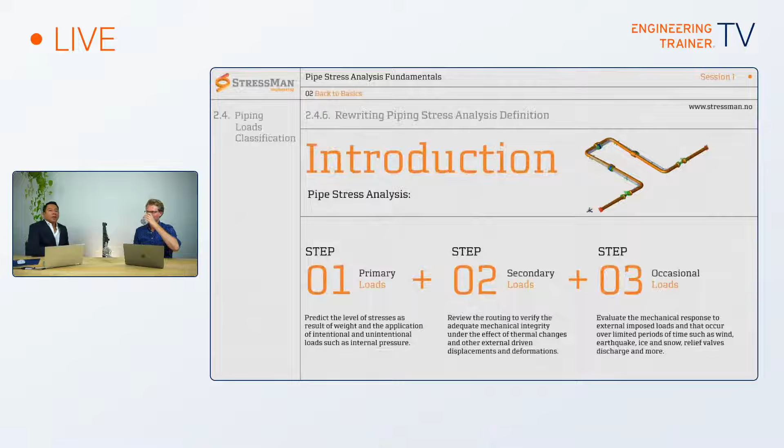As you know, these slides are coming from our training, the piping stress fundamentals course that we have online with Engineering Trainer. This course is about the fundamentals, the foundation to really understand how piping stress works. What is it? Why is it important? And what are the main considerations that you have to take into account to eventually become a good piping stress engineer?

So I would say that when we go to engineering school, you see the stresses as not something that you have to compare against a code. You just do stress analysis of, let's say, a gear, which is a completely different component, not a pipe, and then you use those stresses. But at least in my experience, in engineering school you don't compare it against a code. It's just, is it going to break? Is it not going to break? Is it going to fail? Is it going to be working or not?

But here in piping, we have codes, and the codes are to regulate the way that we perform or execute our calculation. It's kind of like a guide to play on the safe side.

That is also guidance for younger engineers or for experienced engineers, but also to standardize the way that we execute the project. So at the beginning, we have the primary loads, which is what is shown in this slide, which is pretty much coming from the result of weight and the internal pressure. I would put it like that as the basic part: the weight of the pipe, weight of the fluid, the weight of the insulation and the internal pressure, which in this case, if we use our software, it would be W plus P. That's our primary loads.

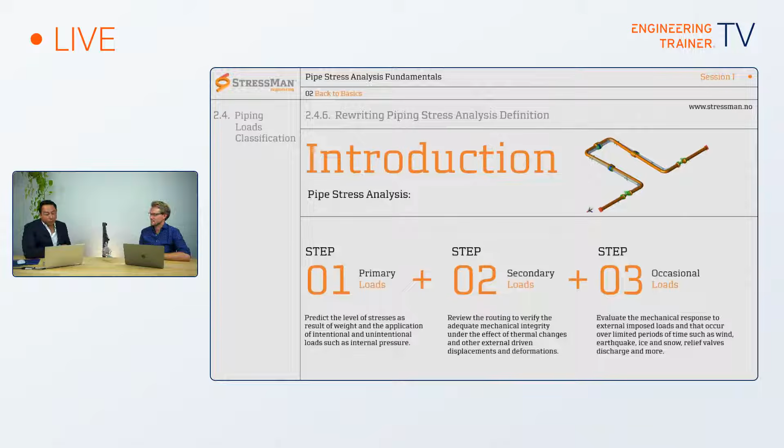Why do we have them in three different groups, primary, secondary, and occasional? Because each one of them is going to be evaluated and compared to the code in a different way. If they were all the same, we could just add the three of them: one is one, the other is two, and the other is three. We have six. The code says that maximum is five. We fail. But no, you cannot combine them like that. That's why we separate them from the beginning. So now we evaluate each one of them, and I think it helps to understand where each one of the issues on your piping system is coming from. Exactly. So now feel free to continue.

Okay. So for example, here we have the primary loads. I really like this picture. I really, really love it. It's so shiny. The render is just pretty.

It is. And as you can see here, these are imposed by loads. What could be the load? The weight of the valve, for example, if you have valves, if you have flanges. They are not self-limiting, and they continue until equilibrium between external and internal loads of the piping system is reached, or until, which is the bad part here, catastrophic rupture of the pipe occurs, when the system collapses. If it's not properly supported, it's going to collapse. If the wall thickness is not well calculated, it's going to collapse.

Now we're going to start talking about the piping stress analysis perspective. When we receive a system that needs to be analyzed in a big project, at the beginning someone else, a piping engineer or a piping materials engineer, is going to do the wall thickness calculation. He's going to give me a pipe specification that I'm going to use, and I'm going to input that information into my CAESAR calculation or piping stress software. I'm going to say this is the diameter, this is the wall thickness.

You would say that you don't have to worry about the wall thickness calculation because that was already done. Of course, it could be wrong, but in general, let's assume that it was correct, as part of the pipe spec. So for us, the main thing would be to think about the weight. What do we have? How are we going to support our system so it doesn't fall, it doesn't collapse?

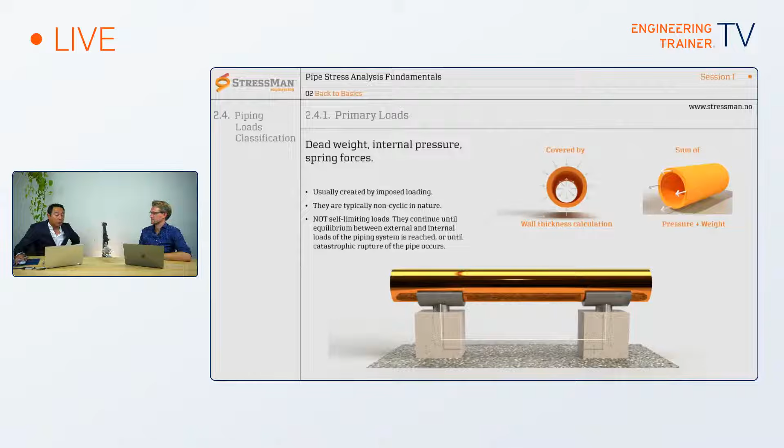I think this is quite a nice graphic to show how the primary loads work. Here we have, as we said, force driven. Once plastic deformation begins, it grows rapidly, and the failure can occur with a single application of a load. Let's have a look at this. I really like this. You have a weight, for example, let's say it's 100 kilograms. This cantilever beam is going to deflect, let's say, 10 millimeters. As you can see in the graphic, I'm going to try to highlight it here as well.

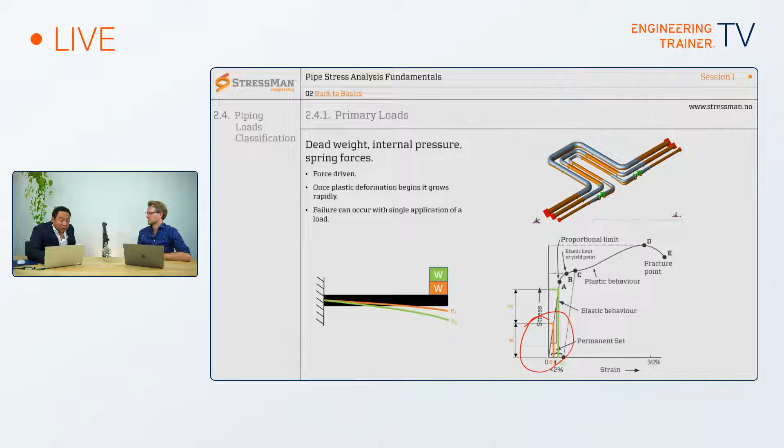As it's shown there, it's going to strain so much that if you double the weight, you double the force, it's going to strain twice as much. As you can see, stress is also twice because we're working within the elastic zone, which means that it's going to be linear, according to Hooke's law.

And then for the third one, let's say that we add another weight. Now this third weight, now 100, 200, 300, is going to go beyond the elastic behavior, and now it's going to start behaving completely differently. So right here is when it collapses. It's just so simple to see, so simple to understand.

If you have a look at this other part right here, at this image, it's not showing it. Just a second. No worries.

Right here, as you can see, there's the little deflection that you have on those elbows due to the weight, because the supports are right here, the other supports are here, and the others are here. So this section is just deflecting a little bit because of its own weight. It's sagging. So if that weight was really, really big, it would just collapse. It would just fall. That's the way that it works.

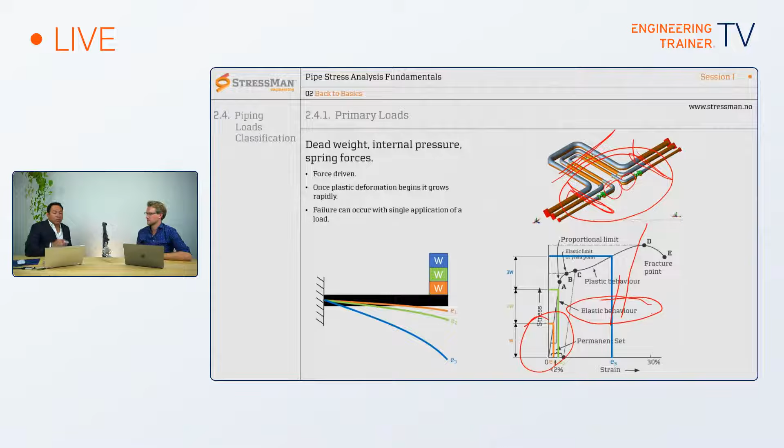Just to simplify everything for everybody, somebody said, "Oh, let's do some pipe span tables," and here different values are taken into consideration, like pipe size, thickness, material. There are multiple variables. The density is so important as well. Whether it's full of fluid, let's say water, or you're going to support a line that is just vapor or gas, the density is going to change.

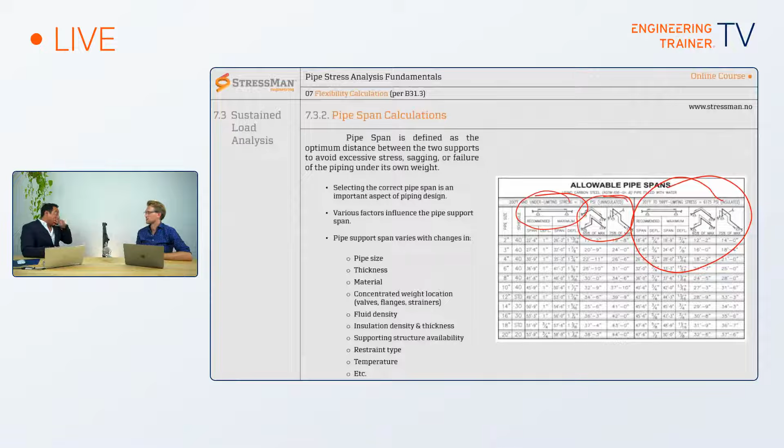And at the end, you're going to have your span for a straight run of pipe, for some quite popular configurations like a horizontal run, or in an XYZ direction. Different routings, basically. These are kind of standard routings. If you see here also, this one is for 200 Fahrenheit and below, and this one is from 200 to 600 Fahrenheit. The pipe span is going to vary depending on the temperature.

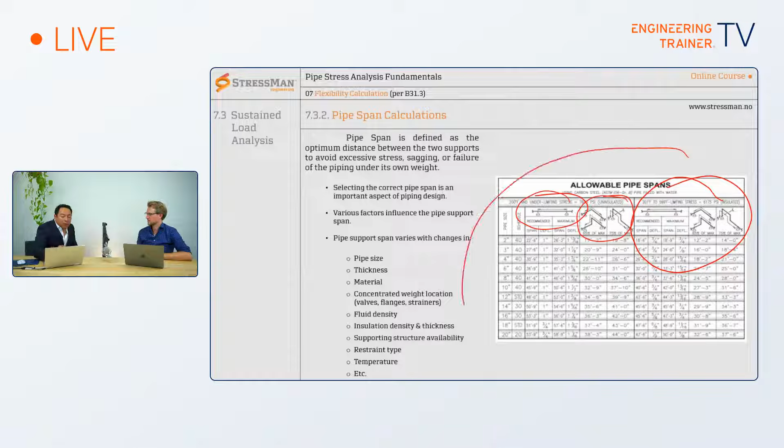So there are multiple variables, but you can always use this type of table just to make it easier for everybody. So what kind of limit is used in these tables? I would say in general it's like 5/8 of an inch of sagging. I think that would be the standard. Maybe some other companies could be more stringent, or a little bit more flexible. It really depends.

And at the end, it doesn't mean that if you are exceeding 5/8 of an inch, it's going to fail. No, it's still okay. That's why we have to use engineering judgment. At the end, these are just recommendations. Just because it says that the maximum span for a 2-inch line is, I don't know, 8 feet, what if you have 9 feet? It could be okay, no problem.

So that's why it's important that we know this. And like I said, this presentation is the fundamentals. This is the basics, so at least when we start getting into this topic, we know where everything is coming from.

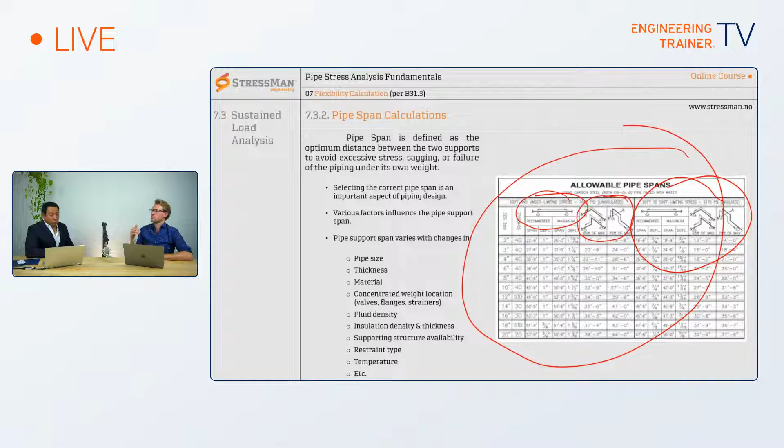So just to summarize, even if you would be using a span length that would be a little bit longer, technically your primary stresses could still be okay, depending on the project, whether you're allowed to or not. But that is how it is organized, if I understand correctly. Based on this introduction about primary stresses, I would like to ask just two basic questions, just to get the basics understood really well.

Let's say you're doing a stress analysis, and in your stress analysis it shows that the primary stress is much too high. Let's say 500%, like a crazy amount. You ignore that, and the system would be built. So what would actually happen?

Well, when it's that much, I think it would just collapse. It wouldn't even be able to stand in place. I cannot even imagine what could happen, but it just cannot be together for too long. Right, basically it just collapses due to plastic deformation, right? That's it. That's what would happen in the steel.

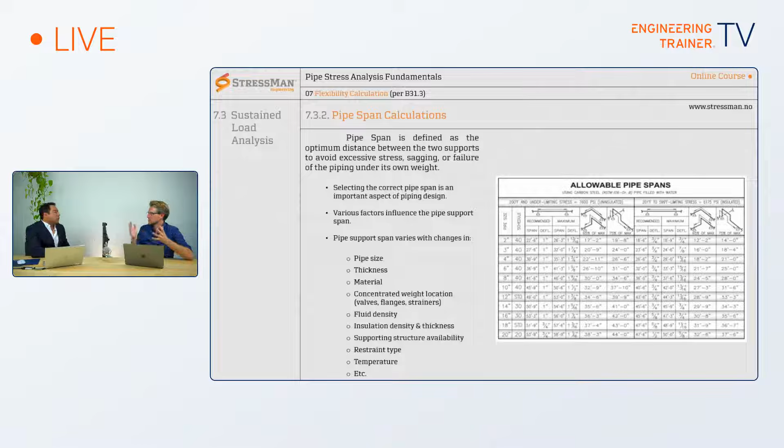All right. So having said that, what is the general methodology to solve high primary stresses? What is the general approach people take? Just to add more support. At the end, I think that's the basic, the easiest solution. And obviously, the other one will be to increase the wall thickness on the pipe.

It can also help because maybe the issue is not coming only from the weight. Maybe there is something wrong with the pressure in the calculation, and if you increase the wall thickness in your pipe, or you go to the next rating in your specification, then problem solved as well. Because at the end, it's not just weight, it's also pressure. So adding supports if you're evaluating weight, and making sure your thickness is sufficient for high pressure, which is also a primary load.

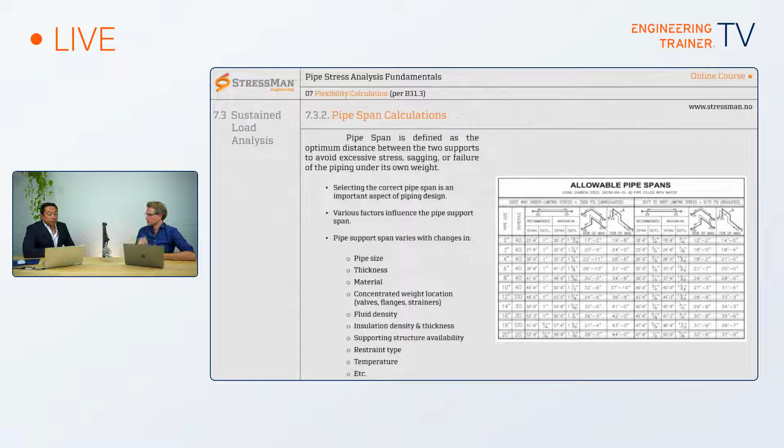All right. So maybe we can now jump into secondary stresses. Secondary loads, I would say in general, are related to displacement. Displacement could be due to sagging and hogging, like I mentioned earlier. It could be matchup tolerances, a little bit of fabrication, settlement, that's another option. But for this particular presentation, let's just think about thermal expansion, the change in temperature from the initial position to the final position.

When you have your temperature T, and then you add that delta T, your pipe is going to grow delta L. Something really simple, very basic. With this type of stresses, they are going to be localized. When they fail, it's not the entire system that is going to fail. It's just in a section, like a fracture in a component, a fracture in an elbow. Maybe if there is a flange close by, it's going to be subjected to a large bending moment and start leaking. That kind of stuff.

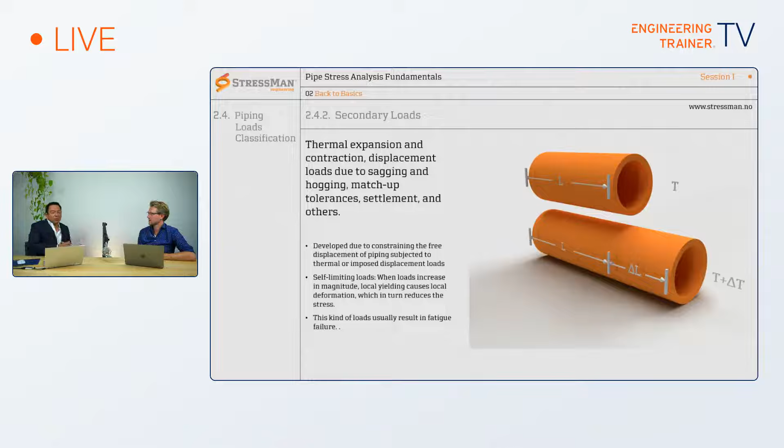It's kind of simple, but that's pretty much the secondary loads. This is a good example as well. Again, this is displacement driven. Once the deformation begins, loads tend to dissipate due to local deformation, which I'm going to show here. And the failure occurs after several load cycles. It may be fine the first time, but over a period of time it's just going to fail.

We have here delta T, let's say, using an easy number, 100 Celsius. That's the deformation you're going to have, the E, the strain, and the forces. Now you add temperature 2, which is twice as hot, another 100 degrees, 200 degrees, and it's still within the elastic behavior. I think now you can see it, elastic behavior. And everything is going well right there. But then we have this one here.

Now it goes 3 times E, and now it's 300 Celsius, let's say. At 300 Celsius we're past the elastic behavior, and it's supposed to go to the plastic behavior. But the stress that we're calculating here is not a real stress, because we're not using the stress-strain curve that we normally use, but the code allows us to do this. And I think it makes it easier. And at the end, it's because these stresses are not going to happen in the entire system, just in a specific location, and that's why it can work that way. All right.

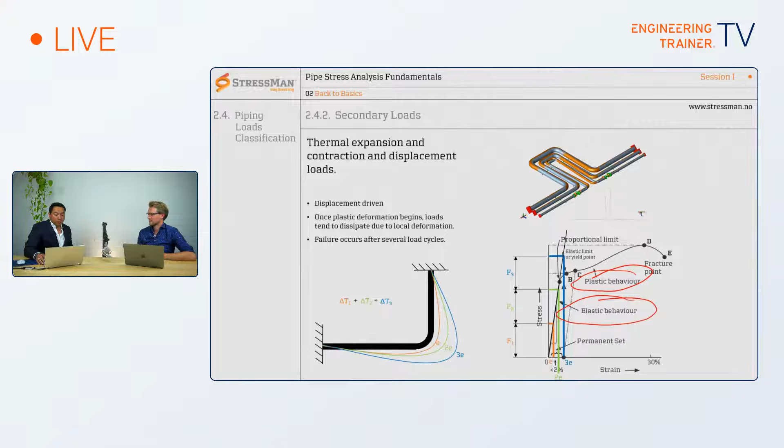Here, for example, we have some examples about thermal expansion and how it behaves in a piping system. Right. It's always important to take into consideration the thermal growth that you're going to have in your system, so you don't have issues like this. So what do we see here? We see a piece of piping.

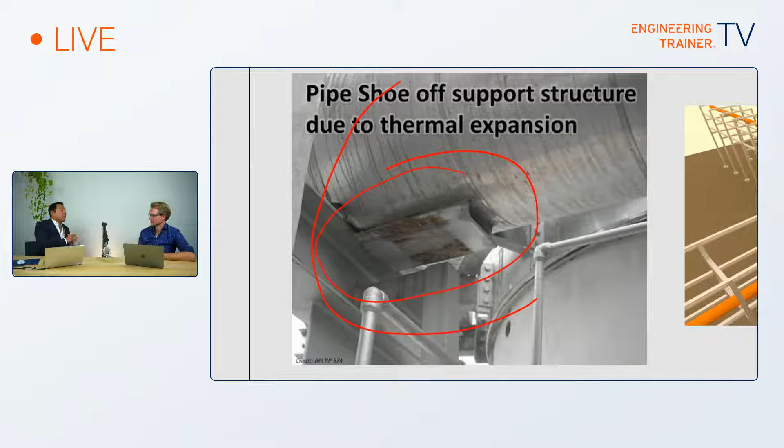For example, here you can see a shoe that, because of thermal expansion, is moving too much. Because it's moving too much, it fell off the steel. I would say maybe this is not such a big deal. It fell, it's going to be resting on the insulation. But what happens if this tries to go back to its original position? Now there is going to be a force that is going to try to go the other way.

Basically, an axial stop, kind of. It's like an axial stop but in one direction, because if it goes the other way, it's still free to move. So those are the kind of issues that you have to take into consideration when you are looking at your thermal loads, which in this case are our secondary loads. So what do we see at the top image?

Excuse me. Oh, my voice is getting a little bit bad.

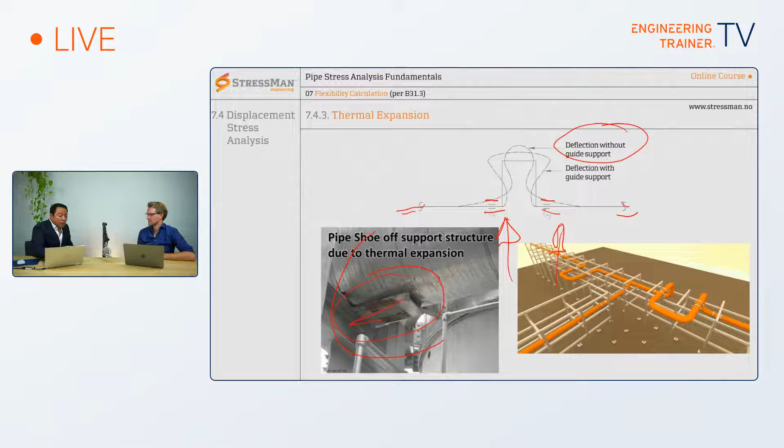The other one may not, but perhaps it's in an enclosed location, or this location is protected, or it has a shade, and the wind doesn't affect the pipe. So there are multiple options. But I would say in general that's what is happening with the primary and the secondary loads.

All right. We have one image left on the bottom right. Maybe we could address that as well. There's two expansion loops, obviously. Maybe again the question, which one is the best one? What is the difference?

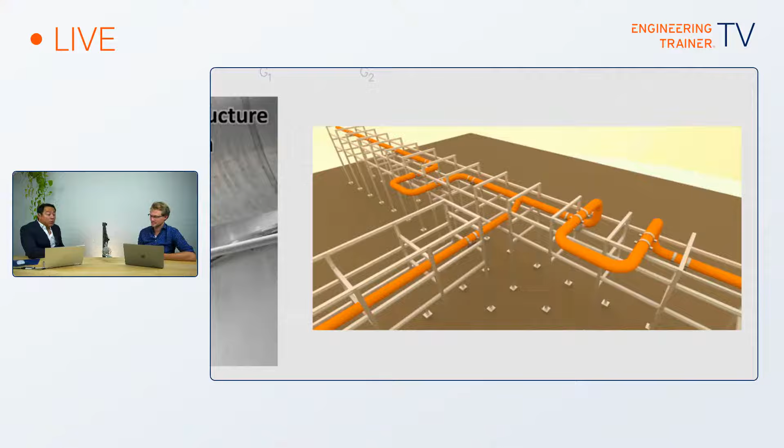Well, this one is also interesting. I mean, both are options that you can have in a piping system. The first one, as you see, has four elbows. With the four elbows, it's going to have less flexibility. It's more rigid routing. This one has six elbows, so this is a lot more flexible.

Yeah. The thing is, in this one right here, in some cases you cannot have a flat turn because there are more pipes right next to it. That's why when you are in a pipe rack, you have multiple levels. So in the first level, there are lines running north-south. Then in an intermediate level, you have lines running east-west. So you go up one level, then you go across, then maybe you can come back and then go down, without interfering with the other pipes.

Yeah. You can have the horizontal loop as well if you are at the edge. I mean, it's possible too. Or you can have horizontal loops when there is just nothing around. Right. There is no need to have the vertical component for this expansion loop. Yeah. Just something simple.

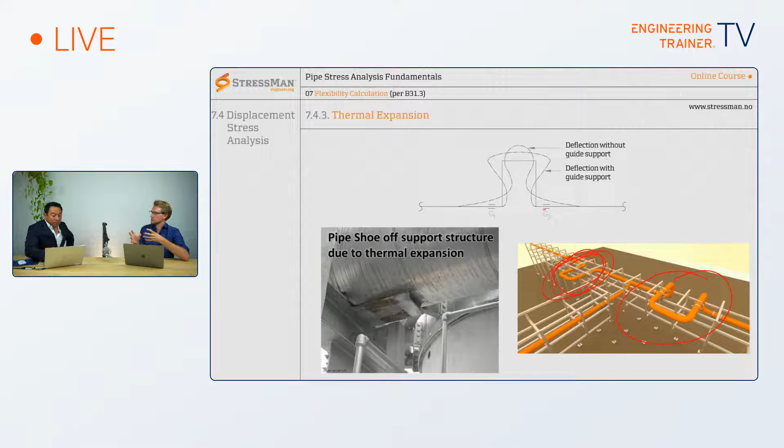All right. So just to jump on this topic a little bit, I'm asking the same questions as I was for primary stress. To summarize, if you want to tackle high primary stresses, you are adding supports, and if you wouldn't do that, then collapse would happen, right? Plastic deformation and collapse. So now let's say you're analyzing secondary stresses, and you find in your system a really high number at some point, and you ignore it, and the system is built. What would actually physically happen?

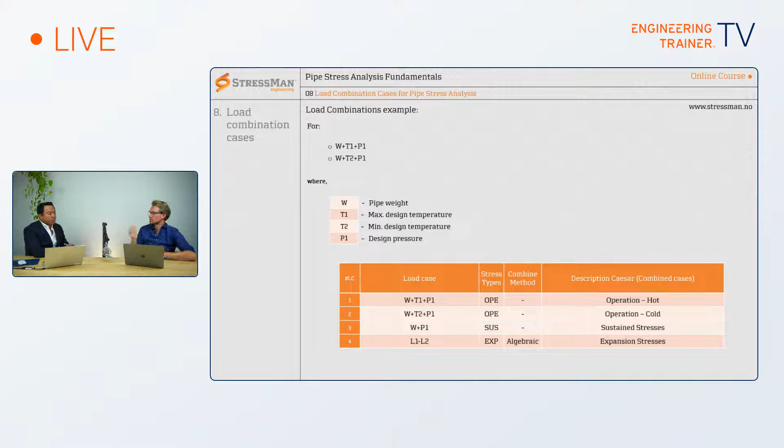So let's say you have high secondary stresses in the system, and that system is built. What would happen? Yeah, that one, in my opinion, is more likely to happen. Not necessarily because there was a mistake from the piping engineer, but there are facilities that were built in the 70s or 60s, and they want to increase the capacity of the systems, and now they are increasing the temperature for some lines, or also the velocities and the capacities of some of the machines. So the pipe that was designed for, let's say, 200 Celsius, they now want to run at 250 Celsius.

So that little delta could have a great impact in a system. Maybe when the line was designed it was at 90% utilization. Now with this, it's probably going to 110, and it's going to fail. What happens? There could be fracture in the component, or like we said before, near the intrados of an elbow. Like we also mentioned, a flange could bend so that it starts leaking. So typically fracture, that's what you're saying, right? Yes, in welds or items like these.

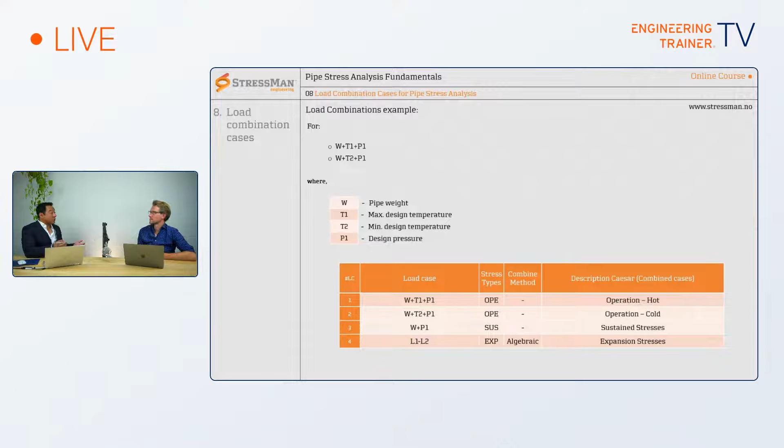So where gross collapse in primary would happen instantly, if it's not supported it would just collapse because of plastic deformation, with this, if you install it and take it into operation, the crack wouldn't be there all of a sudden. It would take some cycling. Yeah. So, for reducing primary stresses, the methodology was adding more supports, rigidity. What is the solution to reducing secondary stresses? To have less supports, add flexibility to the system. Let me correct that. Not necessarily less support, but adding more flexibility to your piping system.

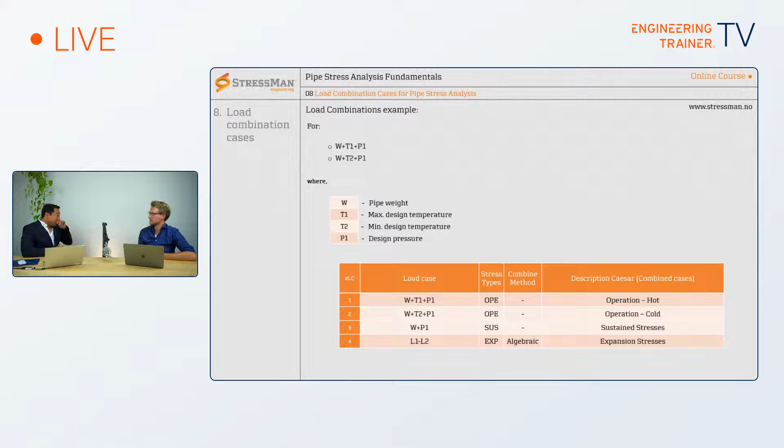Right. So just to finalize this conversation, I think we can encapsulate everything with one word: balance. It's a beautiful word. I think that turns pipe stress engineering into something that feels more like an art. To put it in romantic words, more like an art, where you have to find that balance between having restraints supporting your line for the weight, what everybody can see, having enough support so the pipe doesn't fall.

Then you have step two, the secondary loads, where you want to restrain it and add flexibility. I would say in general some horizontal restraints, but you can also have thermal vertical expansion, for example in a line coming from a tower, or going to a different level in the pipe rack. That's also important, but in general it's to have flexibility and enough restraints as well, so the pipe behaves the way you want. And the one at the end would be the occasional loads.

You now have enough flexibility, you have enough support, but now you have this guy, the third one, which is, I would say, like the bad guy, the bad stress, because with these two it would be just fine. You find the vertical supports, horizontal supports, but now you have the bad boy, and this guy is like, oh, I'm gonna move more than what the thermal expansion is going to move. So now the restraints that may work for secondary loads may affect you.

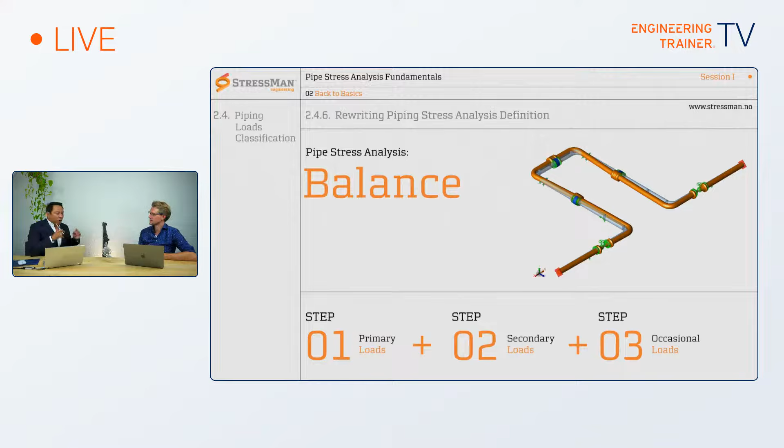And in the third case, would be occasional loads, or vice versa. Exactly. Yeah. So at the end, it's to do that fine tuning between what do I need to do to protect my system due to wind, earthquake, that is also not going to affect my horizontal or thermal expansion. Find that balance, and to support my line properly in the vertical position. Right. So I think once you understand that part, and you have that experience and get that feeling on how to support your lines and your system, it's when you become a piping stress engineer. That's what I see.

I love the analogy with art. So just to summarize about this balance, if I understand it correctly, you're adding supports for the primary loads. Then you're making sure the flexibilities are right for the secondary loads, where sometimes you want more flexibility, and then comes along the occasional stresses due to occasional loads, and those require a lot more supports again. So you have supports, flexibility, supports, and balancing those. Exactly. That is what it's all about.

And I think that's why this discipline that we have, this part of the mechanical engineering that we work on, is so nice, because you will never find the same piping system anywhere. It's always going to be slightly different. You always find new challenges. You always find new routings.

I would also say that the third one, occasional, that's where typically most of the challenges arise, right? Weight checks are typically done rather fast due to span lengths and experienced piping designers. Then you have flexibility, the secondary stresses, but then adding those like earthquake, like wind, that's where the real struggle starts, right? Yeah. I mean, it could be in different cases, because right now we're just thinking about those stresses, but at the same time we also have to verify loads. For example, loads in nozzles.